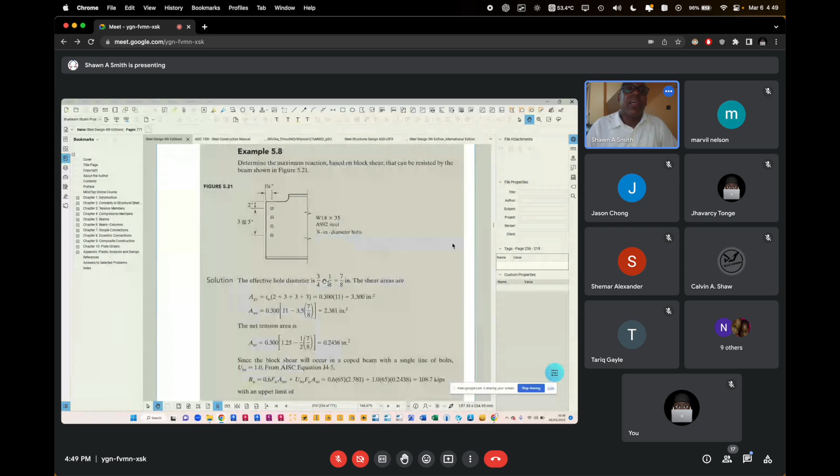But deflection comes after this 5.8. Let me tell you where it comes. 5.9. Right? See, the deflection comes in 5.9. But we are going to be stopping at 5.8, and only the simple part of 5.8. We're not going to be looking at block shear. That's when we start to do moment connections and all that with bolts tearing out pieces of your metal. We're not going to get into that yet, because we're not doing that kind of a design in this course. Maybe you need a structural design 3 for that.

All right. So I am reading from the principal textbook, Steel Design 6th edition by William T. Segui. And we are still on chapter 5 because of the beams, and bullet point 5.8. Now, this part here is just theory or like a narrative behind shear for people to appreciate what shear is before we start to look at all these expressions, formulas, factors, numbers, and whatever. So allow me to read so that we can grasp some knowledge before.

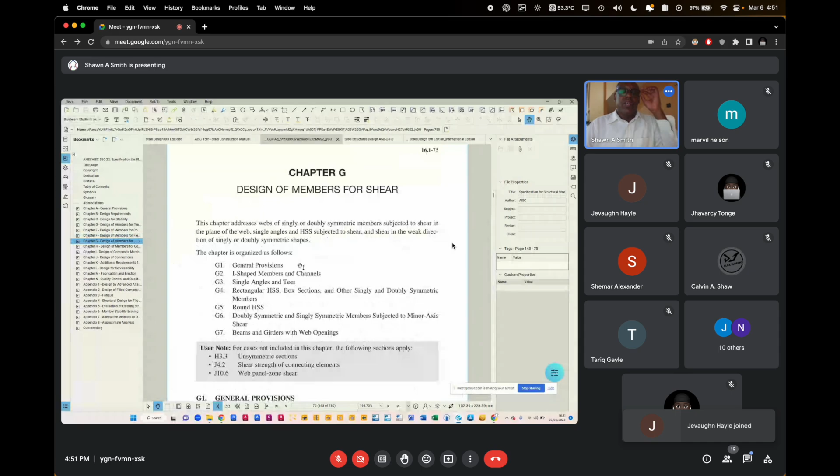Beam shear strength is covered in chapter G of the AISC. Again, this orange color book. I can't overemphasize this book that I gave you. So all that we're going to be looking at for shear is covered in chapter G. And luckily this time the bookmarks or the links are live, so when I click on it, it comes up. So this chapter deals with shear. See them there right away. It says here, design of members for shear. Both hot rolled shapes and welded built-up shapes are covered.

So there are two principal types of members: hot rolled, which are the ones that we have been recommending, the W shapes, or the H shapes, or the S shapes, or the M shapes, or the channels, or the angles. Those are all hot rolled. Or you also have built-up, which are made from welding plates together to get the same form. You weld 3 plates together to get the same I or W. So both of them are covered. We are interested, however, in just the hot rolled one, the one in the manual.

We discuss hot rolled shapes in the present chapter of this book. We are going to be doing the same thing too. And built-ups will be done in chapter 10. We won't be looking at built-up. The AISC provisions for hot rolled shapes are covered in section G2.1. So it's G2, I-shapes, and point 1. So it's referring to right here. Before covering the AISC provisions for shear strength, we will first review some basic concepts from mechanics of materials.

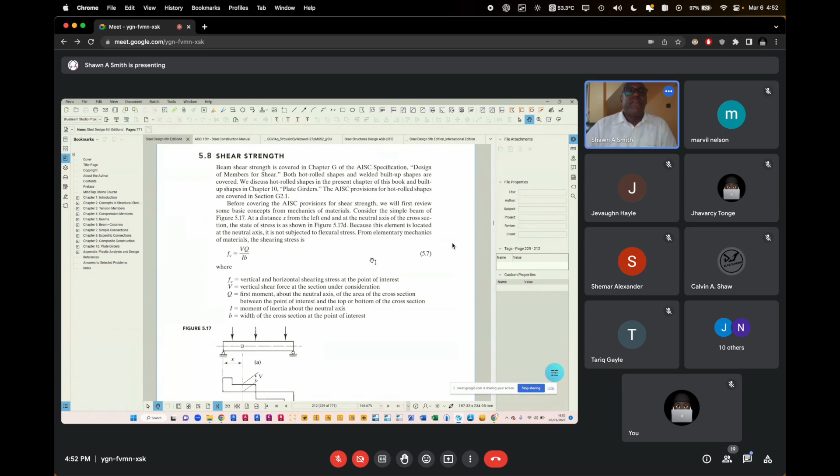Consider the simple beam in figure 5.17. This figure right down here. So this is a simply supported beam with a pin support and a roller support there, and it is subjected to 1, 2, 3 vertical forces, point loads. It says at a distance x, see x here.

From the left end at the neutral axis of the cross section, the state of the stress is shown in figure 5.17D. This is this. At any distance x, the state of the shear stress is shown, right? Because this element is located at the neutral axis, it is not subjected to flexural stress. No stress from bending.

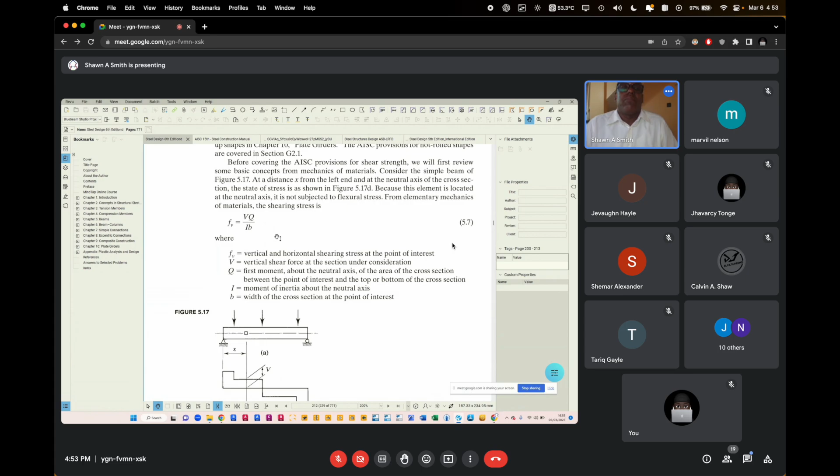From elementary mechanics of materials, the shear stress is given by Fv, which is the symbol for shear stress, equals VQ over Ib. Now this is general information. Let us now look at the definition of each of these terms in this expression. Fv is the vertical and horizontal shear stress at a point of interest, like this point x, right?

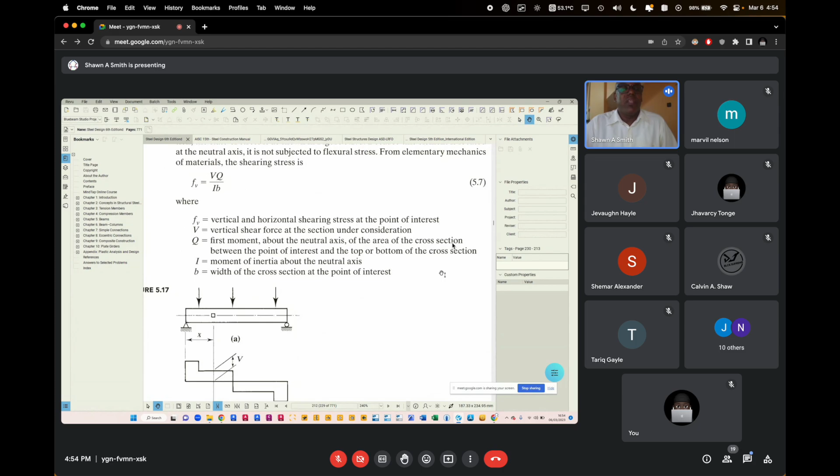V, the vertical shear force at the section under consideration, as induced by these loads, whatever the values are. So you take a particular location and you can find the shear stress at the location, right? Q, the first moment about the neutral axis of the cross section between the point of interest and the top or bottom of the cross section, and I is the moment of inertia about the neutral axis. B is the width of the cross section at the point of interest. So this is a general expression for how to find shear stress using all this illustration there.

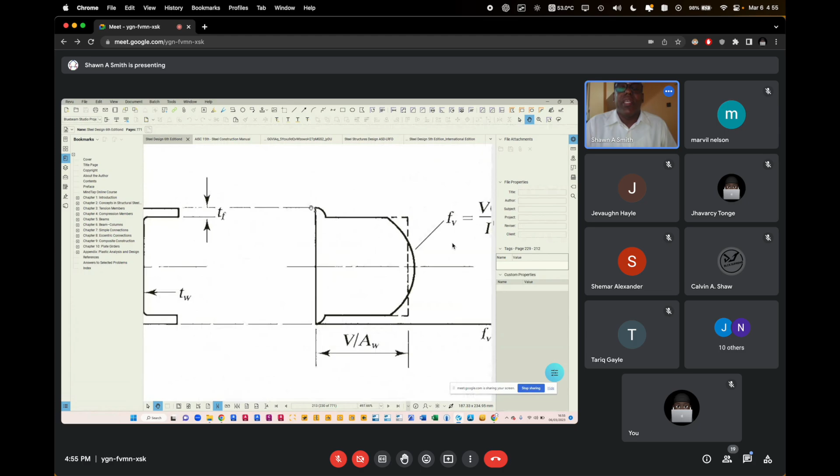However, we're not too interested in this shear stress thing. So we go further. And this is really showing the shear stress diagram. For argument's sake, if this is a cross section of a beam, then this is what the stress would look like. Because this flange is so thin, TF, the stress in the flange is just this little piece. Because the web is this deep, the shear stress will do like this in the web, and then go into this flange again and do this. So this is just to show the stress distribution.

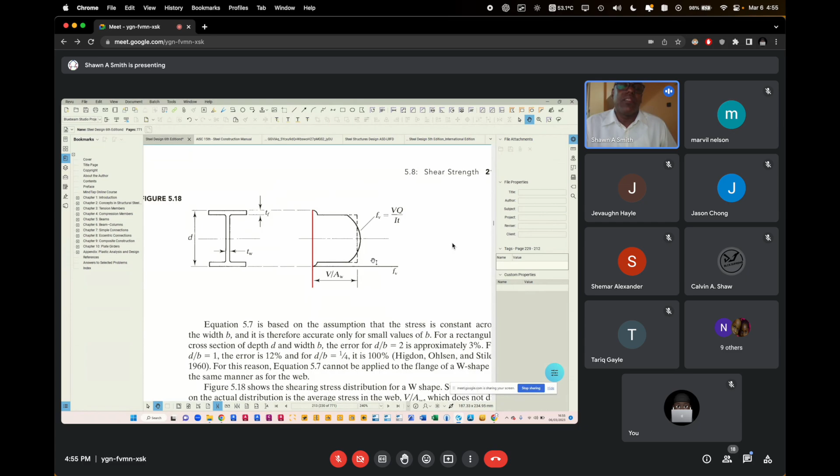This is the zero line really. If there were to be a line right here, then stress at that equals 0, and the stress increases as we move towards the right of the line. So this is 0, and then it starts to take on a value. That's what that means, really. All right.

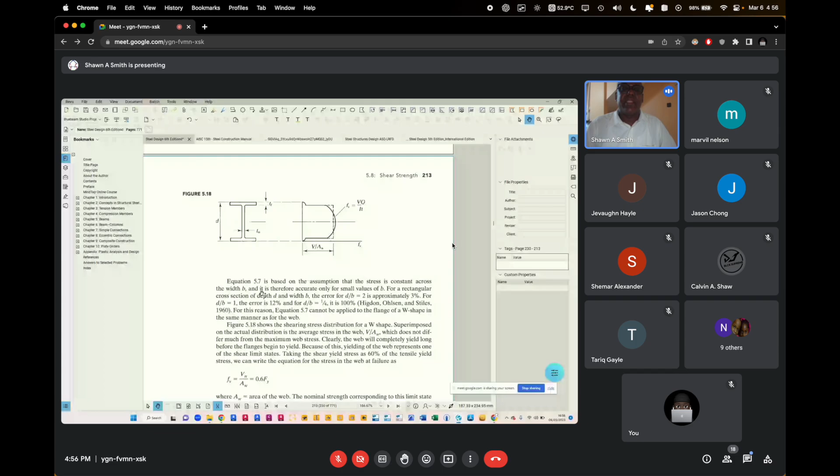Equation 5.7, which is the one above this one up here. Scrolled too fast. Equation 5.7 is based on the assumption that the stress is constant across the width B, and it is therefore accurate only for small values of B. For a rectangular cross-section of depth D and width B, the error for D over B equals 2 is approximately 3%.

For D over B equal 1, a perfect square, the error is 12%, and for D over B equals a quarter, it is 100%. So of course there are limitations. The assumption that the stress is constant across it is a limitation. And this was investigated and written down by these fellows. Thanks be to them. We don't have to get into all this. They use all this information and develop equations for us to work with, which is where we want to get.

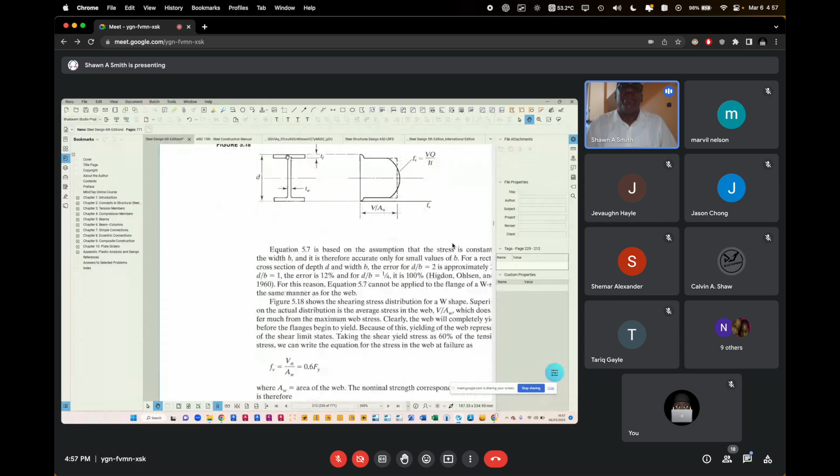For this reason, equation 5.7 cannot be applied to the flange of a W shape in the same manner as for the web. So we could not have applied this crude formula up here to an I section, because there will be different things happening in the web and the flange, respectively. So they are saying that equation is not valid for a W shape. All right.

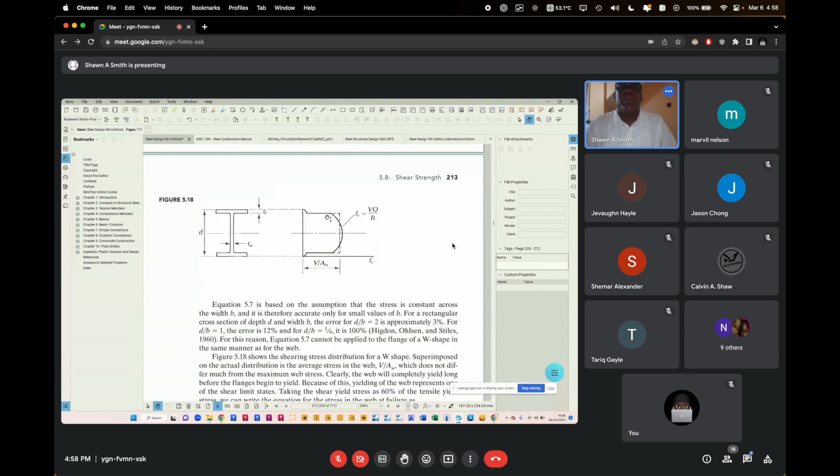Oh, sorry, I should have started right here. Figure 5.18 shows the shear stress distribution for a W shape. 5.18, which is this. I've looked at it before. Superimposed on the actual distribution is the average stress in the web, V over Aw, which does not differ much from the maximum shear stress.

Clearly, the web will completely yield long before the flanges begin to yield. Because of this, yielding of the web represents one of the shear limits. Taking the shear stress at 60% of the tensile stress, we can write the equation for the stress in the web at failure as follows.

So now, this is the equation that we are most interested in, because this is dealing particularly with W shapes or I beams, which we work with, right? Shear stress is equal to Vn over Aw, and that is equal to approximately 60% of the yield stress of the steel. Fy, we already know, is the yield stress, whether it's 36 grade or 50 grade or 65 grade. The 0.6 is because they have departed from saying that this yield stress is 60% of the tensile yield stress. All right?

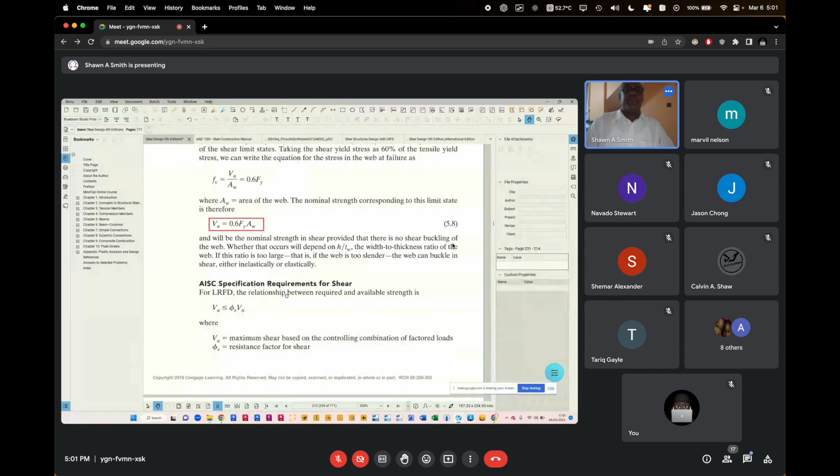Now let's look specifically at the AISC specification requirement for shear. For the LRFD, load and resistance factor design, the relationship between required and available strength is Vu should be less than or equal to phi Vn. What is Vu, class? Vu is nothing but the maximum shear acting on the beam from the load the beam is carrying. That's the ultimate shear, the shear you'll get from your 1.2D plus 1.6L. Vu equals the maximum shear based on the controlling load combination.

And phi v is the resistance factor for shear. We have a resistance factor for tension, for compression, for bending, and now we have a resistance factor for shear. If you look at this equation, class, it's always going to be almost the same. For bending, it was Mu should be less than or equal to phi b Mn. Now we move to shear, it becomes V. When we're doing compression, we had P: Pu should be less than or equal to phi c Pn. So this equation remains the same. It's the requirement for strength.

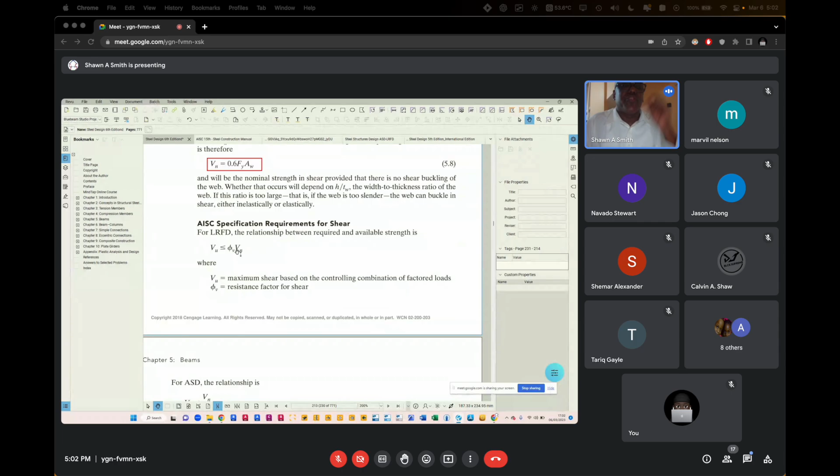Similarly, for the allowable stress design or ASD, the relationship is Va should be less than or equal to Vn over omega v. Again, class, Va is nothing but the maximum shear based on the controlling combination of service loads, and omega v is the safety factor for shear. Those factors you will soon get. As we will see, the values of the resistance factor and safety factor will depend on the web width to thickness ratio.

Section G2.1 of the specification, see the factors in there? So for those who want to learn to jump between documents to find factors, it's quoted. Section G2.1 of the AISC specification covers both beams with stiffened webs and beams with unstiffened webs. In most cases, hot rolled beams will not have stiffeners. So we are going to be dealing with unstiffened webs. We're not going to put any stiffeners on our webs. And for the benefit of those trying to figure out what beam web stiffeners are:

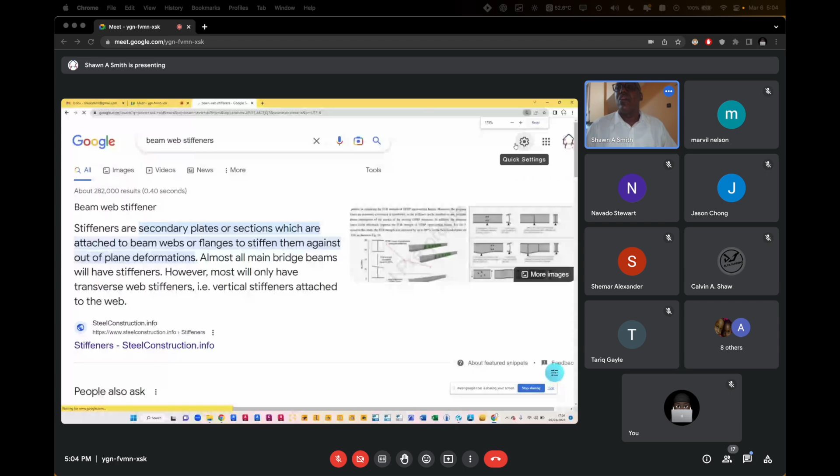You see my screen, class? Are you seeing the screen? Yes, sir. Yes, sir. All right, I'm trying to get the largest possible image of this. All right, fine.

So this beam in the top right hand corner right here, these two vertical members are what we call stiffeners. That's when we have to put in some plate and weld them to the beam so that the web does not buckle. The elements in the manual do not have this; we have to introduce it. So without it, it's referred to as unstiffened webs. We are interested in webs without stiffeners, unstiffened webs.

For this part of it right here, for people who are trying to figure out what is web buckling, this is a perfect example of web buckling. The extreme right image at the top, where you see the web bend like that, that's what we refer to as web buckling. So to prevent web buckling, sometimes we introduce these stiffeners. So the stiffeners brace against the web, so the web cannot bend out, right?

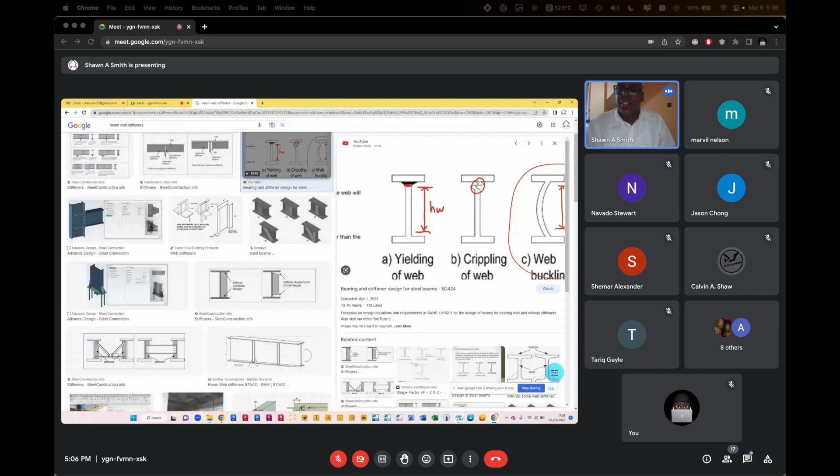So that was just to give an illustration of what unstiffened and stiffened web is. But we are focused on the sections in the manual which do not come with stiffeners, and we want to work with them unstiffened. All right, fine. In most cases, hot-rolled beams will not have stiffeners, and we will defer treatment of stiffened webs until chapter 10. We are not going to chapter 10, so we won't be looking at stiffened web.

The basic strength equation is, all right, so this equation is now moving from up here to something much more complex now. And this is because we now start to take into consideration the fact that the web can also buckle. So the equation becomes Vn, which is the nominal shear, is equal to 0.6 Fy Aw Cv1. Let's define what each of these terms mean.

Aw is area of the web, and that approximates to the depth of the beam times web thickness. It says here d is equal to overall depth of the beam. The overall depth of the beam you will know, class, because it's in the manual or it's also given in the beam designation. W10 by 15 means the beam is 10 inches, right? So that's d, right?

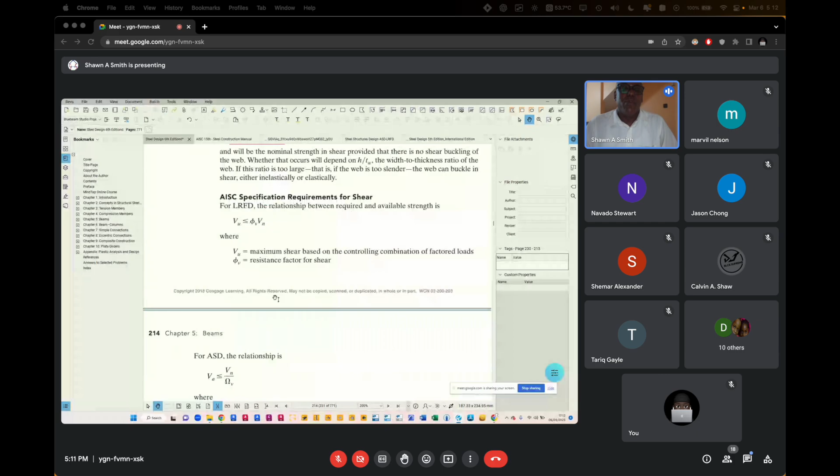All right? However, if h over tw is greater than this, then Cv1 is calculated as follows. And for both of these two cases, class, the value of kv equals 5.34.

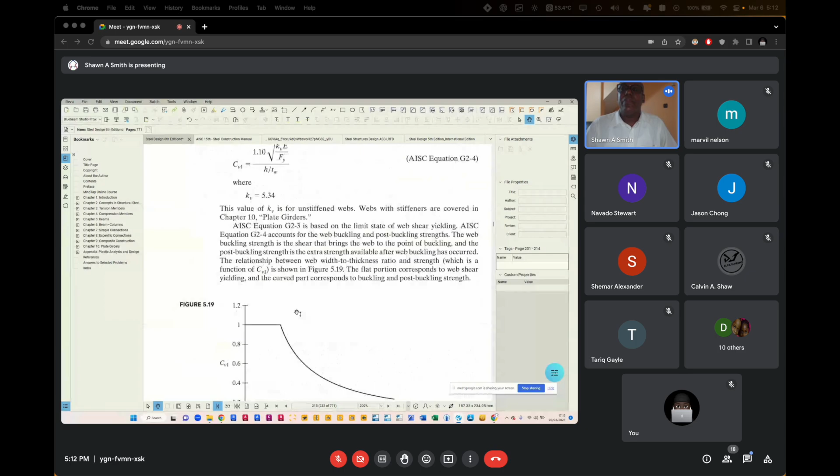The value of Kv is for unstiffened webs. Web stiffeners are covered in chapter 10. We're not going to chapter 10, so we are stuck with this. And class, that is it really. Nothing more to it than that. Unless you want to look at the allowable stress formulation, which converts forces to stresses.

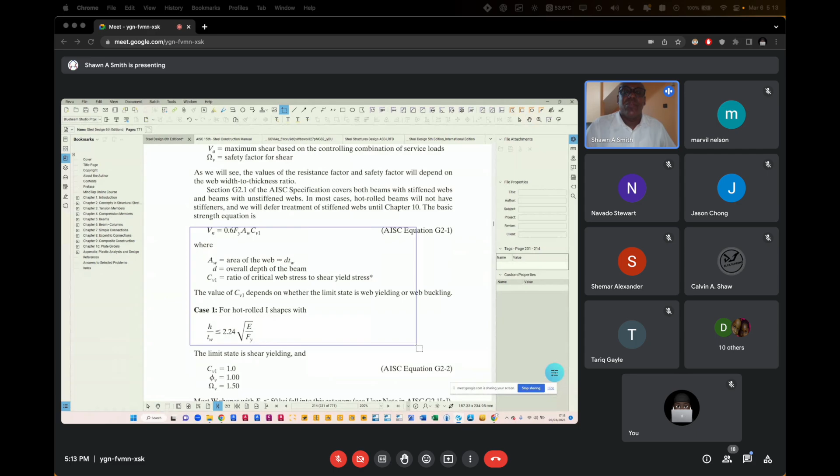All right. Now let us look at this worked example so that people can start to appreciate more what we did. I'm going to see if I can bring down some things so that they make more sense to us when we're doing it.

Jessica, go away with that thing. Yes. Bring it up.

All right, I'm trying to make sure that we have... change color. All right, good. I'm trying to bring down some information so that we don't have to be scrolling too far. All right, so that is that. Then the next check we have to do. So if we check that, then this happens. So we need this also. If that happens, then this. If that happens, then this. Then that. All right, good.

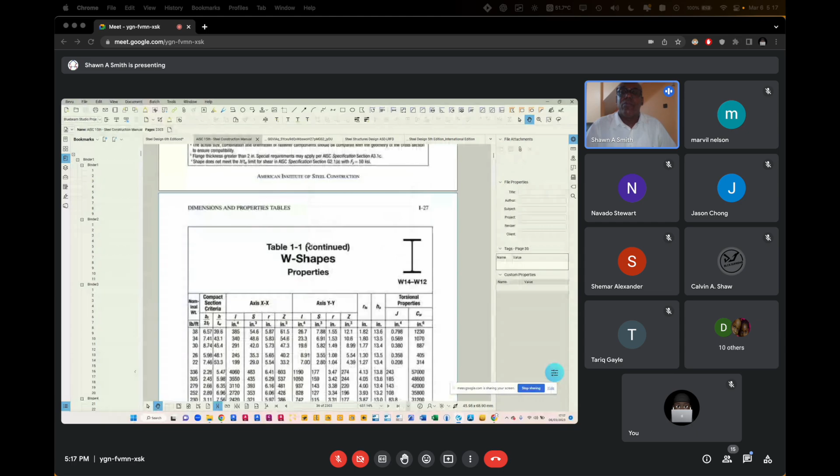So quickly, I am jumping across to the manual again. I'm looking for W section, and it's W14 by 90. So I'm at W12, 14. Looking for W14 by 90. I seem to be not too far from it. W14 by 90, this one. All right, what do we get from the table?

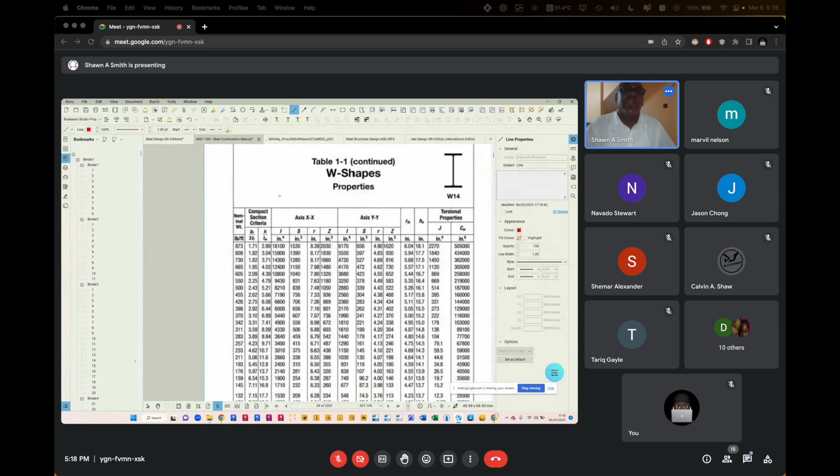In the properties table, the same W14 by 90, we don't even have to calculate anything for ourselves. They already give us this column, h over tw, the third column. So I move down until I come to that, and see, it's the value below. It is 25.9. h over tw, 25.9. So that's a given in the table.

So we have that. What should we do with it, class? We should compare it to this. And the web area Aw is d times tw. d is 14. Like I said before, d is the overall depth of the beam, 14 inches. And what's tw? tw we can find from the manual, up in the dimension part of the table. So tw is in this column. Web thickness, tw. And that is 0.44 inch.

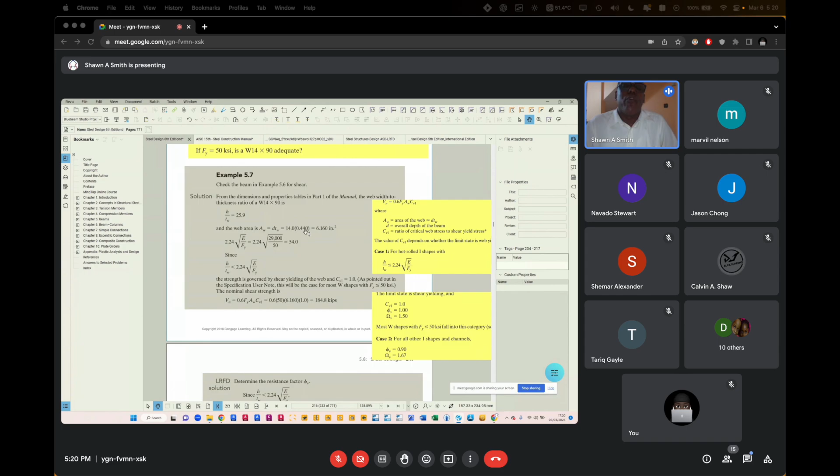So, class, that is what we multiply here. So the area of the web equals the depth of the web, or if you want to call it length of the web, times the thickness of the web, which is 14 times 0.44. We know the depth because it's a W14 element, and the 0.44 is from the table directly. Are we all following?

Class? I'm gonna sleep. Class? Still here, sir. You following? Yes, sir. Good.

So the check is to check if this is less than this. Calculating this numerically, it works out to be 54. Again, it's a ratio; there's no unit to it. So we compare this with this. Because this is smaller, since that is less than that, the strength is governed by shear yielding of the web. The web does not buckle. Remember, it does not buckle. So it says shear yielding, and Cv1 equals 1.

This is what this says. For case 1, for rolled I-shapes, if this complies, then the limit state is shear yielding and Cv equals 1, phi v equals 1, and omega v equals 1.5. And as pointed out in the specification note, this will be the case for most W shapes. And the nominal shear strength is given as this equation.

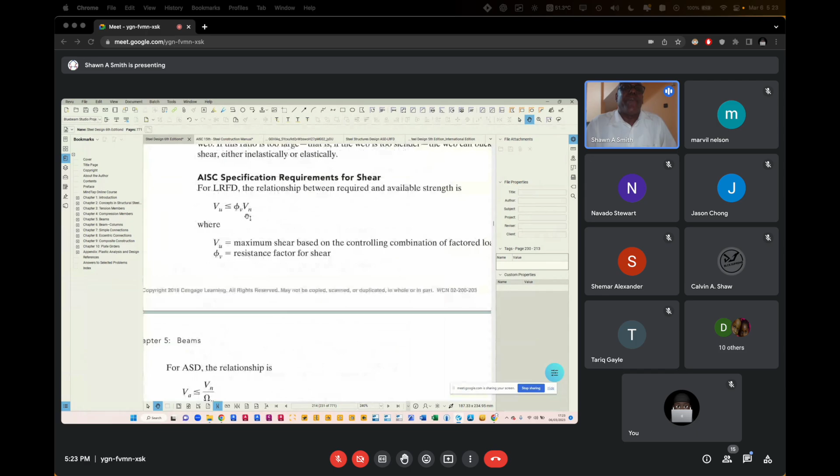The next thing is, this is nominal. What we really want is to be able to make this comparison: Vu should be less than or equal to phi Vn. So far, we have Vn. That's what I calculated just now, 184.8. What do we need? We need phi Vn. How do we find phi Vn? We need to find what phi is.

Phi v is equal to 1, again, because this criterion was met. It is in the shear yielding state. No buckling takes place, so phi v is also 1. So phi Vn is equal to 1 times Vn, which is 184.8, and it remains the same. They have rounded it up to 185 kips. So that is the design shear strength of that particular beam.

We now need to compare it to the shear acting on the beam, this Vu. So we now need to calculate Vu. Vu is nothing but the ultimate shear based on the loads acting. From example 5.6, which we are doing, I'm going to bring this down again so we can see the loads. Where are we? Down here.

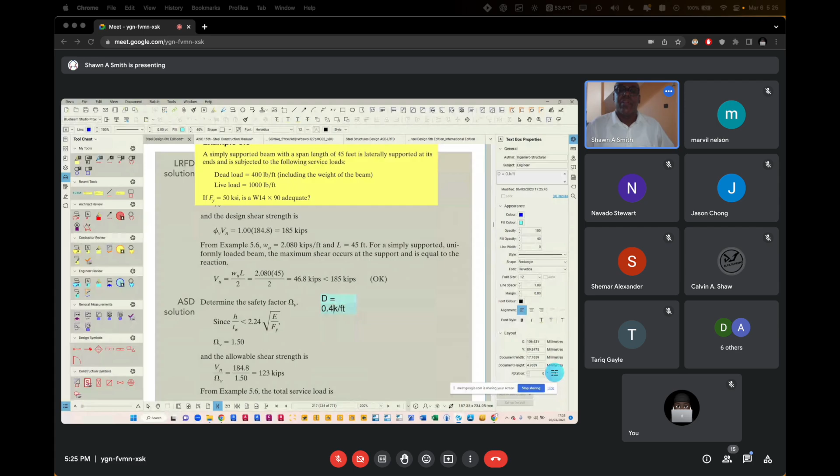Class are going dormant. Where's the class? What's the live load? Class? The live load is equal to 1.0. Are those correct, class? Yes, sir. Sure? Okay, fine.

Now the next thing is to do the load combination. The load combination is 1.2 dead plus 1.6 live. So it's 1.2 times 0.4 plus 1.6 times 1.0. What's the answer there now? That should be 2.08. That's where that 2.08 comes from. For those going through the example who might be wondering where that value came from, it's from the load combination we do when we have only live and dead load.

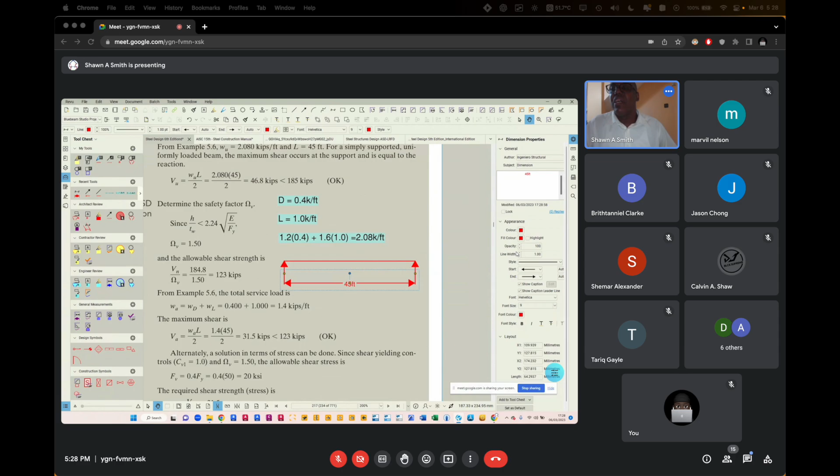If that is too large, let me make it smaller and change the color. All right, that's the beam. Let me drag these up to get some space. The beam has a uniformly distributed load like that, vertical. It carries a uniformly distributed load like that.

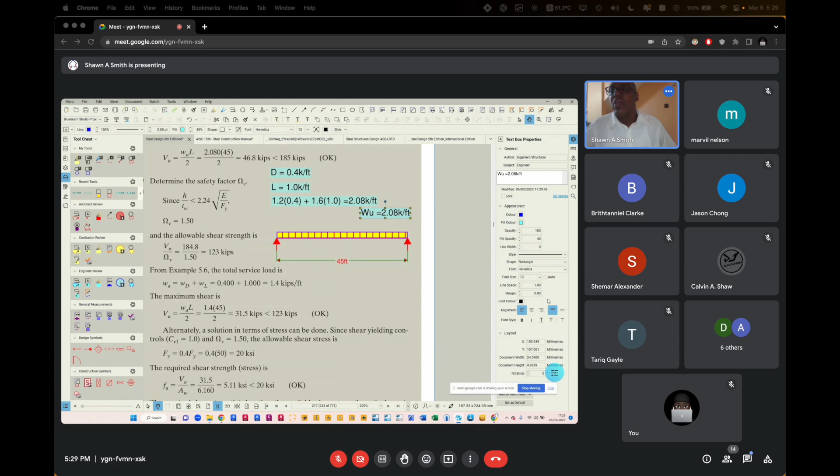And that load at the combined stage, W. I'm not going to put it on dead load; I'm going to put the combined load here. W equals that value, and that included the weight of the beam.

All right. So let me say W equals, for those who are making notes, and I want them to follow clearly what W means. W is when you apply the factors, right? So this is your beam, class: 45 feet long with a combined factored load of 2.08 kip per foot.

Now, we are aiming at finding the shear. The maximum shear force, class, occurs at the supports and has a value equal to that of the reaction. Wrong or right? I am pulling you back to what you should have done in structural analysis or advanced analysis. Yes. You have a simply supported beam with a uniformly distributed load. The maximum shear force happens at the point of the support.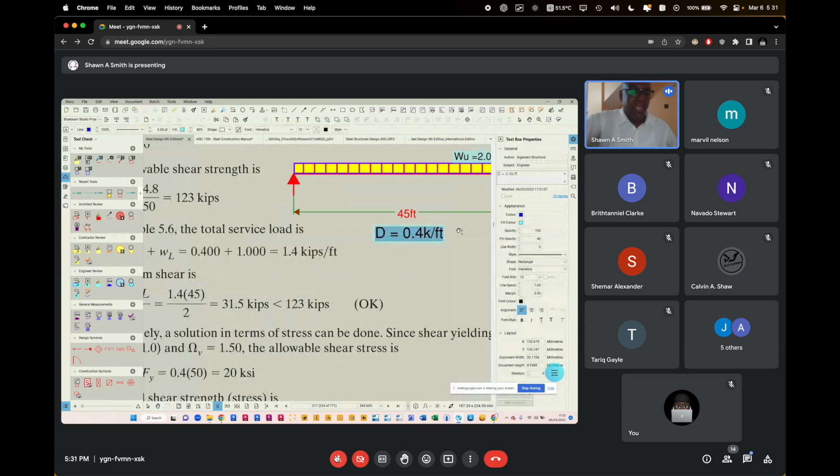That means support A and support B. I am going to go even further by calling them RA and RB. I want to be as simple as possible. RA. I mean, this was from last school year, but let's take the time and go through it now, because you won't be able to do shear unless you know this. All right, and this is now RB. What I want to speak to is that the maximum shear force V,

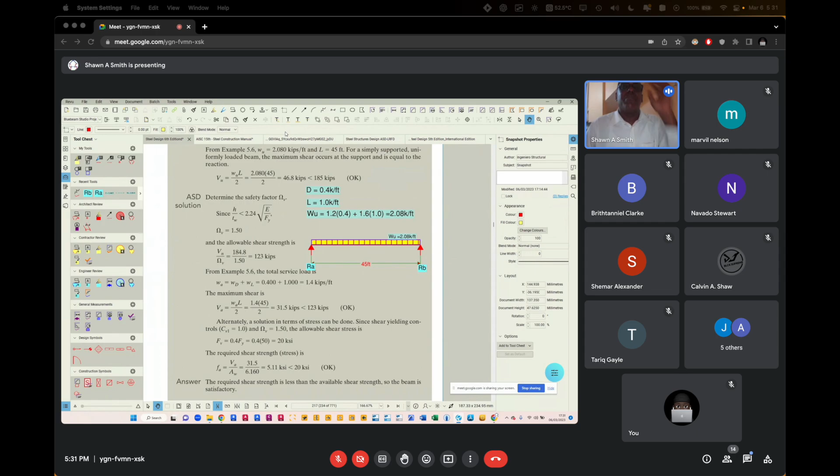and by the way, class, why does the moment diagram for that thing look like a parabola? Remember that diagram? That's the moment diagram. The shear force diagram for this will look like this. It crosses at 0 right there. Let me change the color. That's the shear force diagram for a beam like this. The shear force is 0 at the middle of the beam where the moment is maximum.

For those who know the relationship between shear and moment, the shear force is nothing but the first derivative of the moment, or vice versa. Right? So when the shear force equals 0, then the moment is at its maximum. There is a relationship between shear and moment, and that relationship is actually taking integration, integrating using the limits. But we're not getting to that.

What we know is that the maximum shear force on a simply supported beam carrying a uniform distributed load occurs at the supports, at these 2 points. It is a linear relationship. All right? And that value is equal to the value of the support reaction. So if you know how to find the reaction of a beam carrying a uniform load, then you already know the shear force. How do we find the reactions of a beam carrying uniform distributed load? Like this.

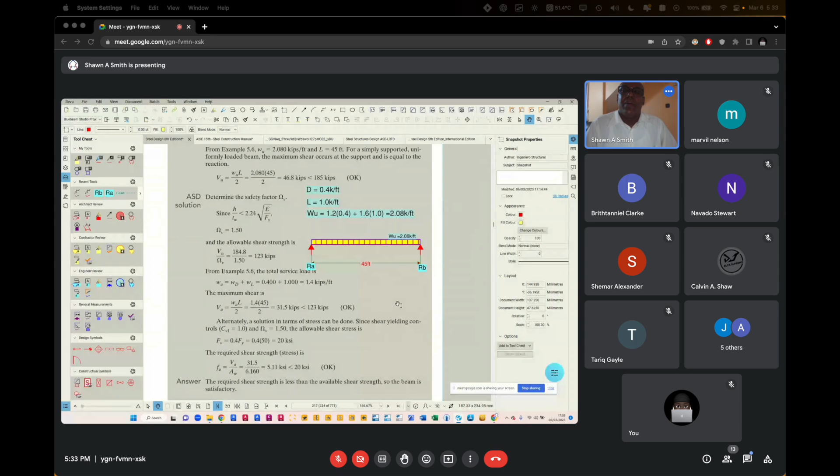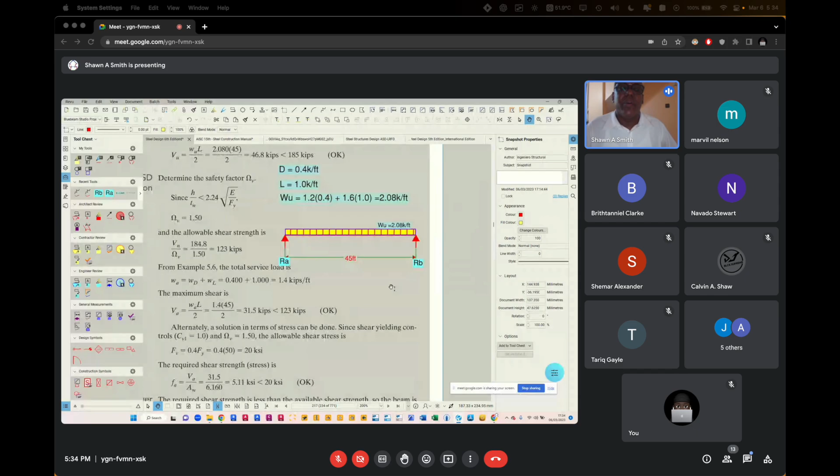But remember. So I think you'd convert the UDL into a point load and analyze it. And how do you do that? How do you convert this UDL into a point load? Times it by half the span, I think. Huh? Multiply by half the span. No, wait, hold on. One person said, yes, convert this UDL into a point load. And my question is, how do you convert all of this UDL into a point load? Right, sorry, you hear what I'm saying? Go ahead now. I think you multiply 2.08 by half the span.

No, let's go. If you're finding the reaction from this, you multiply by half of the span. But if you're converting all of this to a point load, you have to multiply by all of the span. Right, sir. Are you following? Class, are you following? Remember, the idea of this class is not to teach this. This is really prerequisite knowledge coming to this.

But let's go again. What does 2.08 kips per foot mean? What does it mean in real life? What is the idea of 2.08 kips per foot? No, no. I want an explanation. 2.08 kip per foot. What does that mean, really?

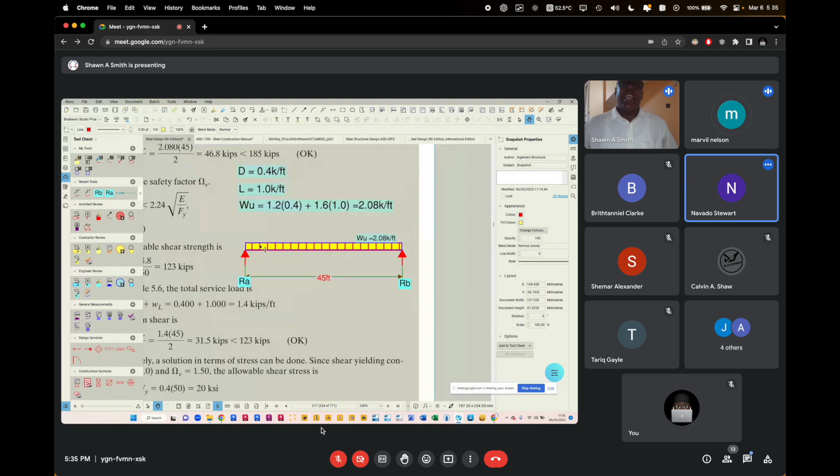Perfect. For every foot that we measure, if you should take it off and weigh it, it should weigh 2.08 kip. Then if every foot weighs that, and I have 45 feet in all, what do I need to know the total load on this beam? Multiply by the total length. You multiply the UDL by the total length. Good. Span. If for every foot it weighs that, then for 45 foot it has to be 45 times this. All right? So we're getting somewhere.

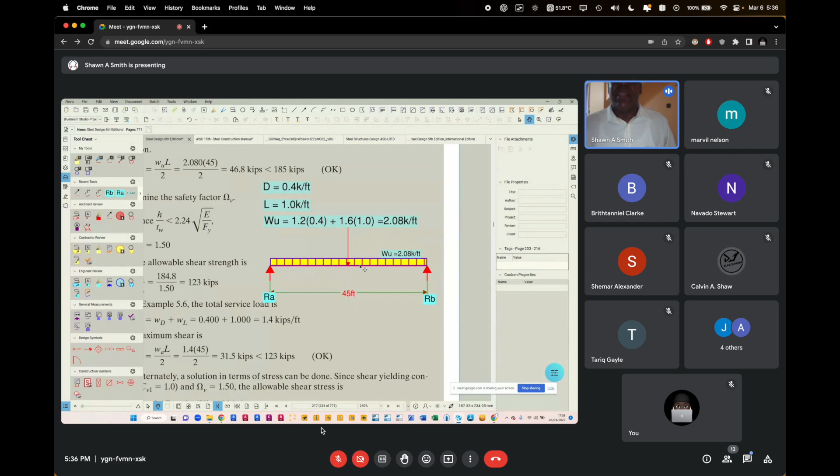Which is why this says W times L. So if I multiply this times 45, it brings me to an assumed point load in the middle. This times that converts this thing as if it were a point load in the middle with a value of 90, whatever it is. Now, if I have a point load in the middle and two reactions carrying it, what is the sensible thing to do to know how much each support carries? Divided by 2, because it's in the exact middle. If it were at one side, it would be a different scenario. But because we convert a uniform load to a point load in the middle, it's going to be half of this point load.

Class, that is what takes place over here. So it's WL to bring it to a point load, divided by 2 because half comes to the reaction. Are we seeing that now, class? Did that explanation make this easier for those who had seen this and didn't know where it came from? Class? Sir, I understand it now. You understand it now? Yes, sir. Anybody else still in doubt how they came about this?

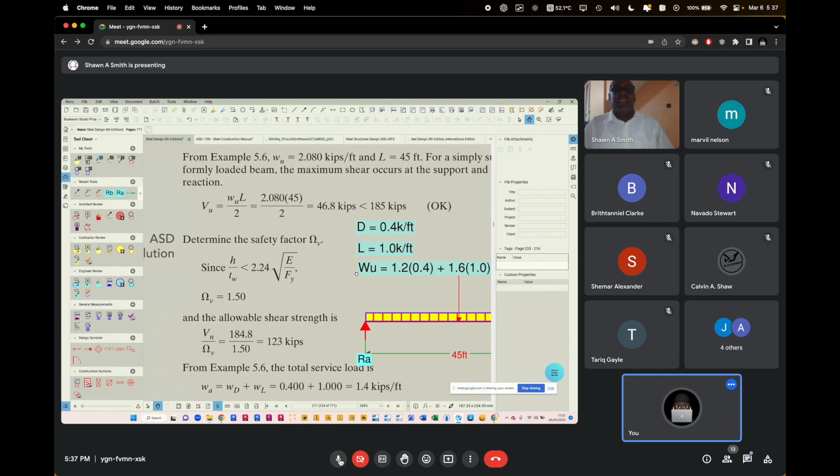No, we don't want the point load. We just virtually do something that brings it to a point load so that it can be easier. You can easily relate to it. But for some people who know analysis, you don't need to do that. You could just multiply this by half of this, which in essence is this. It's really bringing it to a point load in any case, because a reaction is a point load. A reaction will read kips and not kip-feet. As long as I multiply this by anything to do with feet, the feet is cancelled because it was in the denominator.

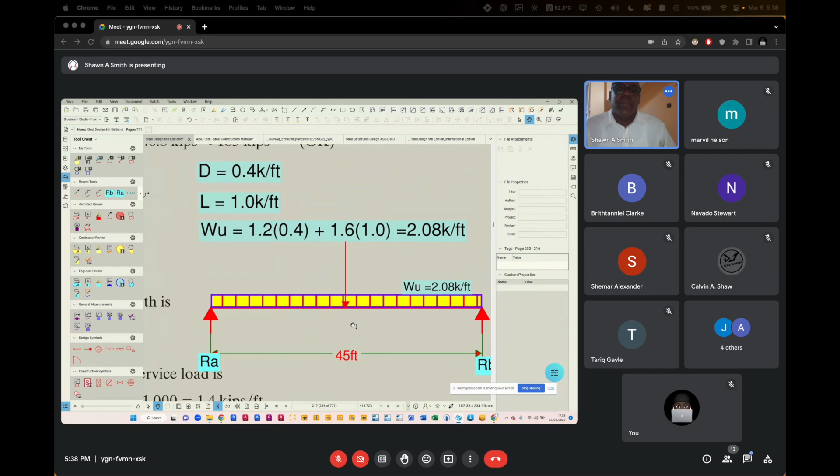But what this is doing in essence is saying: if for every 1 foot, let's say these red lines were 1 foot, each time I move 1 foot, if I take this out and weigh it on a scale, I will get 2.08 kips. That's what it means. So if I have 45 of that, 45 times the unit weight will give me the total. And that total will be like a point load acting in the middle.

Let me see if I can explain. You take a book. The book is rectangular. Where is the center of mass for that book? Class, the person who asked the question. You take a book, for example. Where exactly on that book is the center of mass? In the center of the book. Because the book is uniform. It's a uniform thickness, uniform length, uniform height.

The same thing with the load. The load is a uniform distribution. The load is rectangular like that. So the load acts at the center. The mass acts at the center of that thing, which is what this does. Which is why I said we can really convert this into a concentrated load which acts through the center of it. Is that clear now?

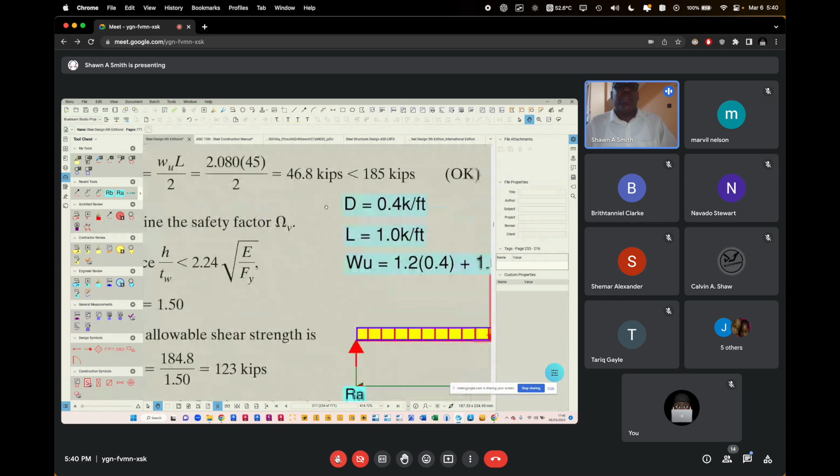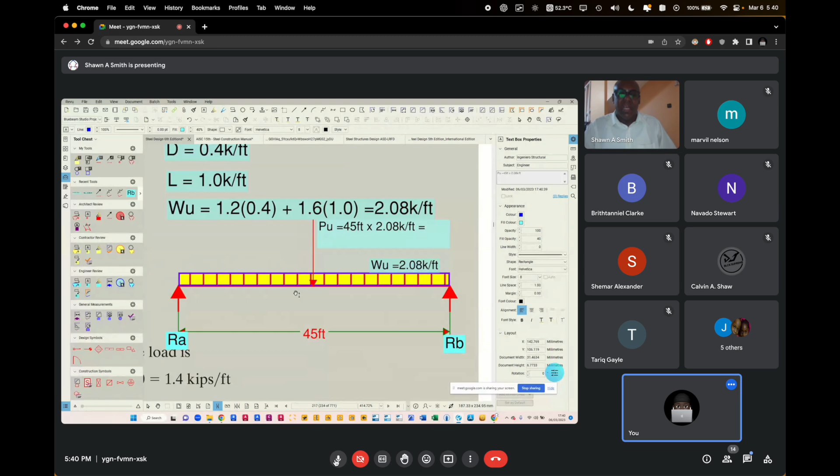Good. Now that we have converted that to a load in the center by multiplying, the value becomes whatever that is. Let's work it out and call it PU. If I multiply 45 feet times that, what do we get? Somebody give me the value. 45 times is 90 something. 93.6. That's 93.6 kips. Feet gone now because the 45 is in feet.

Good. That arrow, class, I'm going to change the color and make it thicker. That arrow represents a point load coming from this. And it's done this way because you are now able to see it quicker. If I want to find RA, if this is in the middle, it's a symmetric load arrangement. That means obviously half of this comes to this, half goes to that. That's why they virtually bring this up as a point load, so that you can quickly see it can't go any other way. Half must come to this, half must go to that.

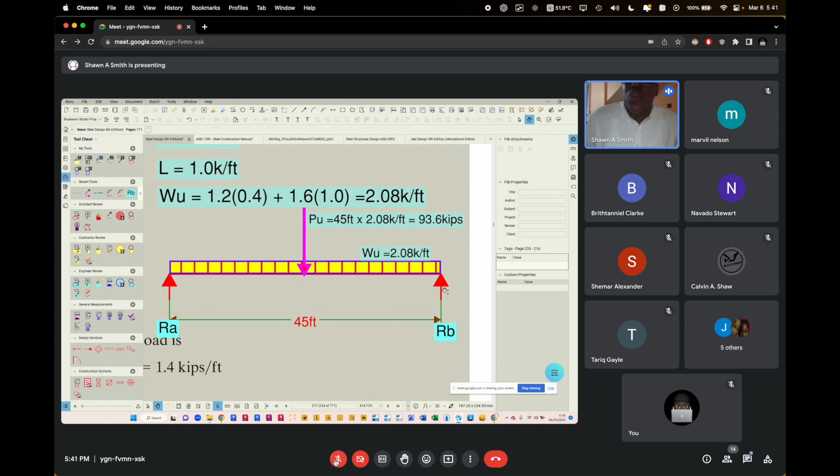All right. So once you have this, then you can say, okay, fine. RA is equal to this divided by 2. RB is equal to this divided by 2, which is what this over here is saying in one step. W times L is the same thing that we did right here. W times L gives us that. And divide by 2 is because we have 2 supports, so half goes to this one, half goes to that one. Same thing in one step.

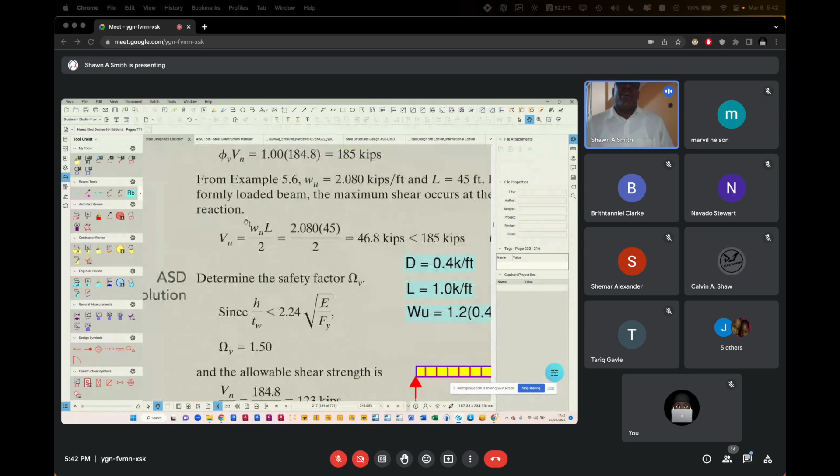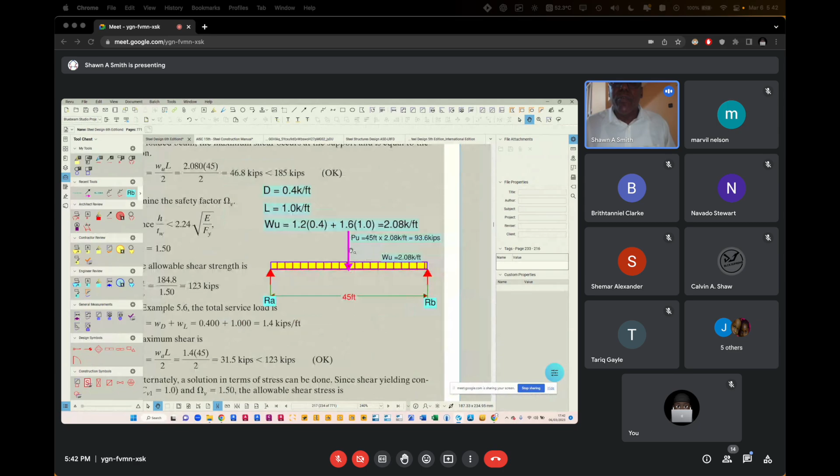I am taking the time to go through this so that for those who don't understand how this just jumps to that, it can now click there. So this is what happens. This is the illustration of what happens there. Again, go read up on analysis, because this is the simplest beam analysis you ever have to do.

All right, so let's leave that now. So we now know how to find VU. So VU is equal to this, which is this divided by 2. So this is the maximum shear acting on the end of the beam. But the beam can carry all of this, can't it? The design shear strength of the beam is actually 185 kips, but only 46 is acting on the beam. It therefore means that the beam is way satisfactory.

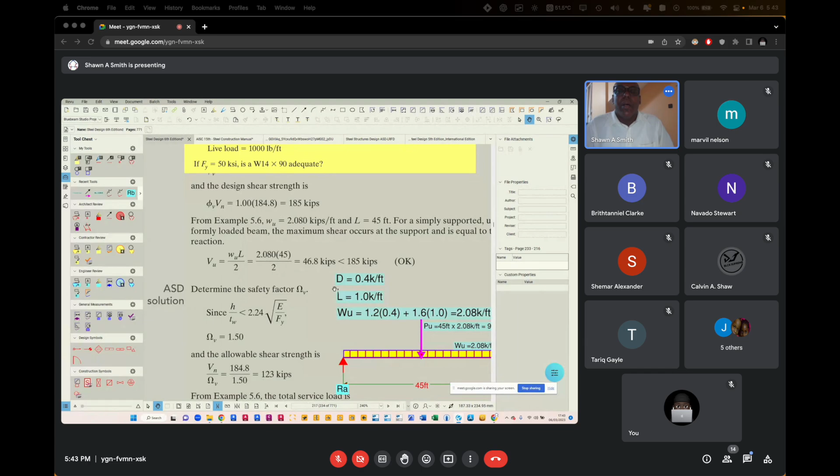Is that good, class? Any questions about that? Any questions? Class is rather silent. Let me see what's inside. 14 people in class. All right. Any question before we move to another example?

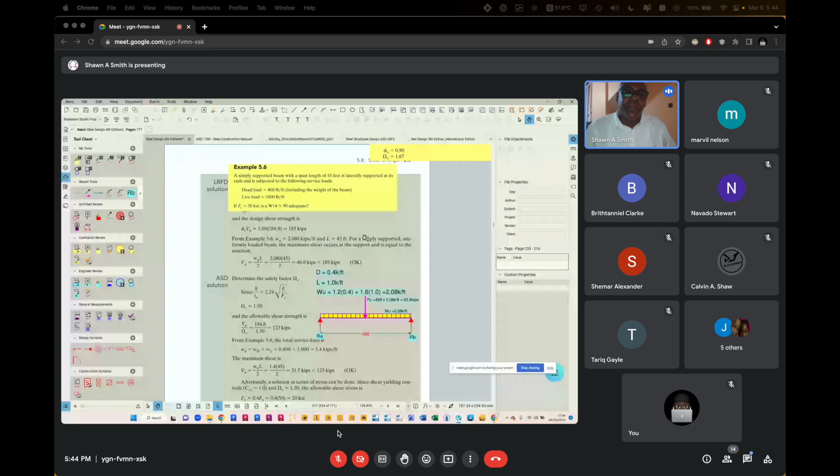And the same thing, class, would have been done with the ASD method, just that your Va will be coming from wa, and you'll be using a factor of 1. 1 times dead load plus 1 times live load to give it. But the principle remains the same. The beam will still comply, any of these two you use. All right.

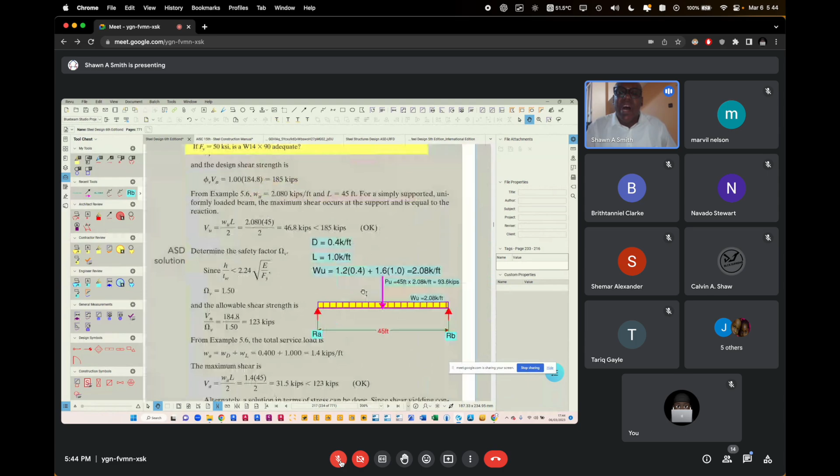Can I go to another example which sheds some more light? And also have you do this calculation yourself? Good. So let me clean up this. I forget. Clean up this. I'm going to find another example in another book, which maybe we should do this one. Okay, fine. Okay, perfect. Here's a good example. All right, I might as well make a sketch for this also.

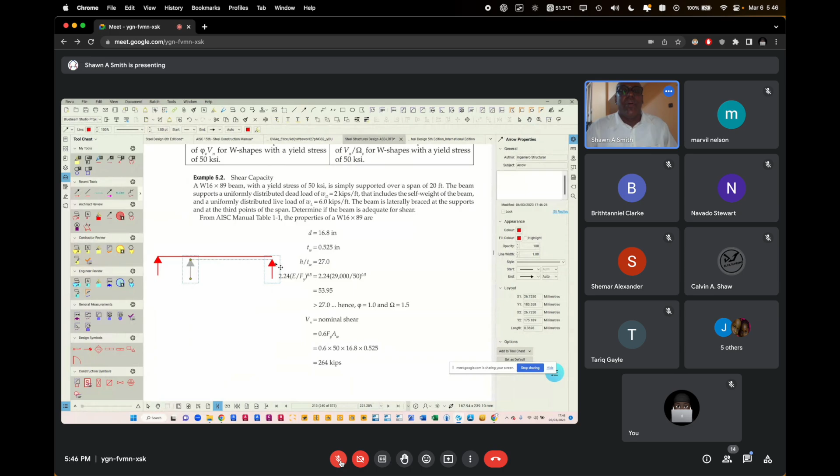It says here a W16 by 89 beam with a yield stress of 50 ksi is simply supported over a span of 20 feet. The beam is 20 feet long, class. Let me make a 20 feet long sketch, like I did earlier. All right, fine. So this beam is 20 feet long. 20 feet.

All right. So as not to confuse anything, I want to change some colors. So the beam is 20 feet long. It's a W16 by 89. So we want that down here also. W16 by 89. It says here, it carries a uniformly distributed dead load of 2 kips per foot, and that includes the self-weight, and a uniformly distributed live load of 6 kips per foot.

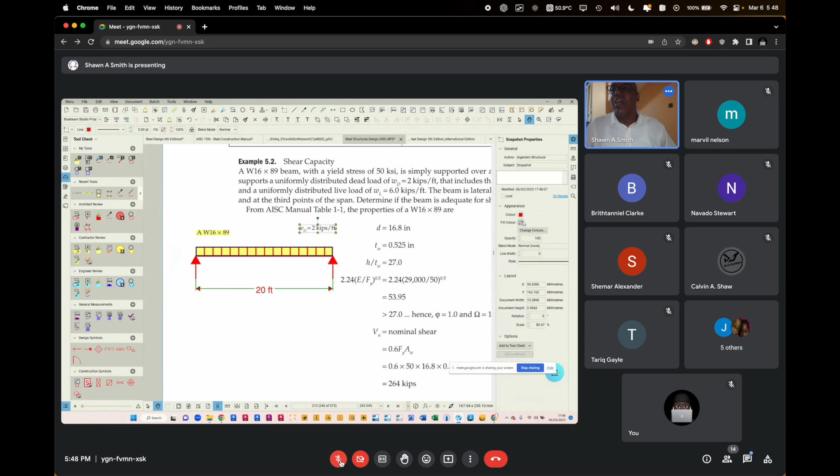So I'm going to draw something representing the loads. I want to change the color. No, that's too pronounced. All right, fine. So let's copy these now down there for ease and quick reference. So dead load is inclusive of the self-weight of the beam, and this is live load.

Oh, what's that? All right. So see this sketch there? That's the beam. And of course, we know that Fy equals 50 ksi. These are all data that we need to have right at our fingertips. So those are all data ready to go. We have that sketch, class.

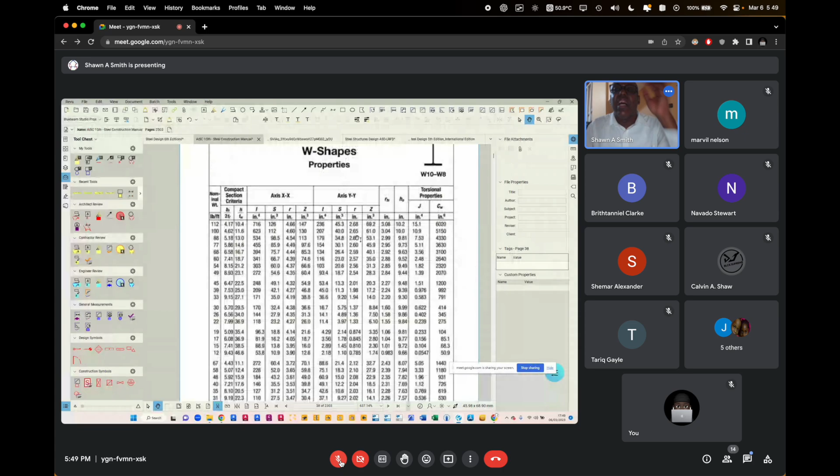Now, the question is, determine if the beam is adequate for shear. So the first thing we need to do is to check the web for slenderness, right? The first thing is to go and find h over tw. Again, this is the W16 by 89, so we go to our manual, and since we were on W14, let me delete all these red lines. I'm looking for W16. W16 should be above W14, so I scroll up. All right, so let me get rid of these out of my book.

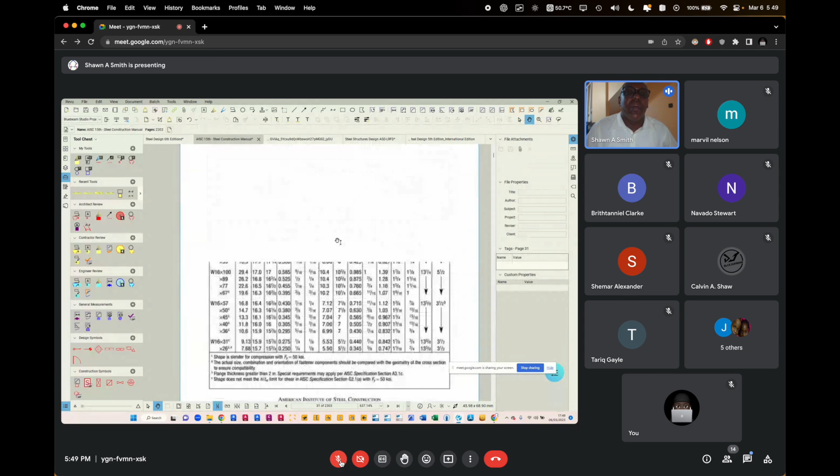W14, we're looking for W16. W6, fine. So W16x89. W18, W16. Okay, fine. So W16x89, here goes. So this is W16x89 on the dimensions page. That's dimensions. And I need to find W16x89 under the... okay, fine. So it's 1, 2, 3.

The 3 is stock number 3 from the bottom. 89, this one. Stock number 1, stock number 2. All right, fine. So this one. So I have identified my W16 in both dimensions and properties. So we want h over tw, which is this from the properties table. h over tw is equal to 27.

Now the remainder of it is calculation. 2.24 times the square root of... it's the same square root. They have only used a different method of doing it: raise it to the power of a half, or you say square root. However, it works out to be 53.95.

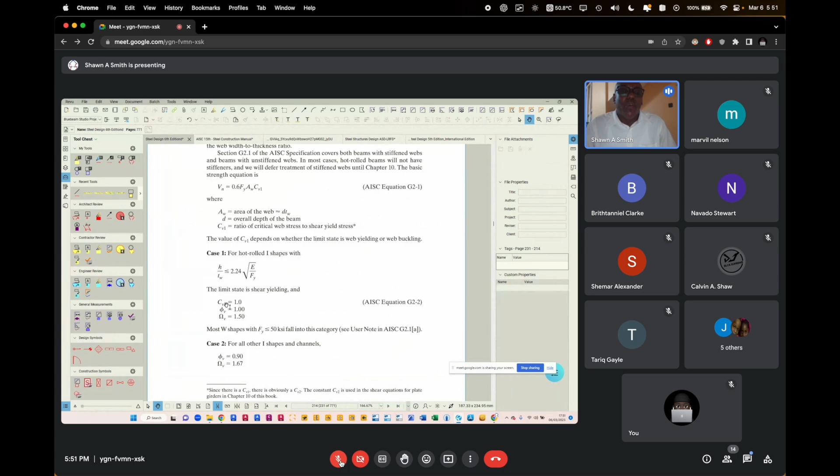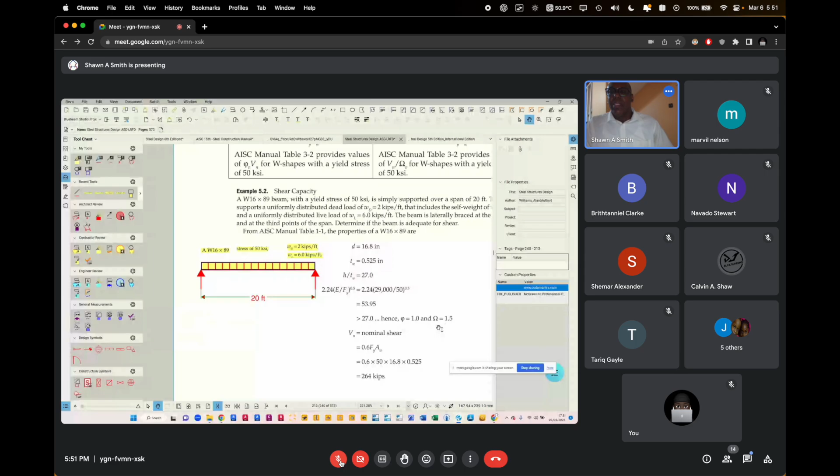It says if h over tw is less than this value, then the web is not slender and it will fail under yielding, which is what this says up here, case 1. Therefore, if that happens, then Cv1 equals 1, phi v equals 1, and omega v equals 1.5. So it did happen in this case, which is why they said phi equals 1, omega equals 1.5, and Cv also equals 1. They did not write that out.

And that is why the nominal shear is equal to 0.6 Fy times Aw Cv1, which is equal to 1, but they dropped it because it's equal to 1. And that gives us a nominal shear of 264 kips, class. That is from the material of the beam itself. Now we need to compare the design strength. This is nominal strength, so we need to calculate the design strength next. The design strength is phi times Vn. Phi is equal to 1, as seen down here, so it remains the same.

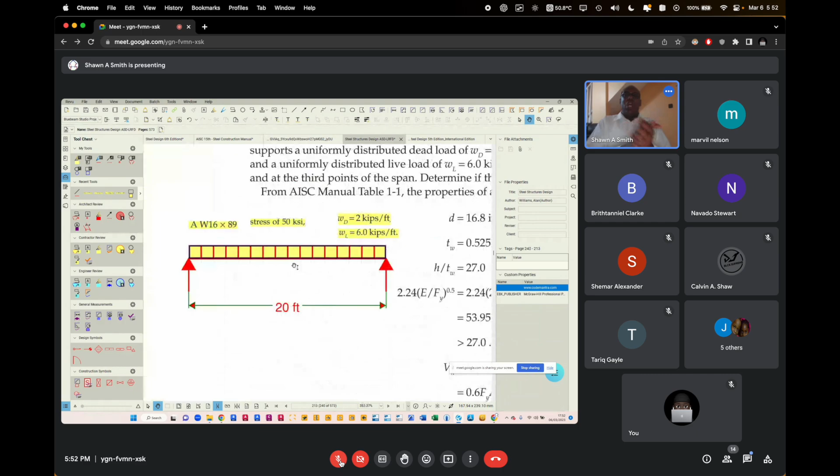Now, the big part is for you. We have just gone through an example. I want you independently to calculate Vu, the shear acting on the end of the beam, based on what we just did. By the way, these are unfactored loads as is right now. Do not confuse them with Wu. Right now, WD means unfactored dead load, and WL means unfactored live load. When you factor them and add them together, they become Wu.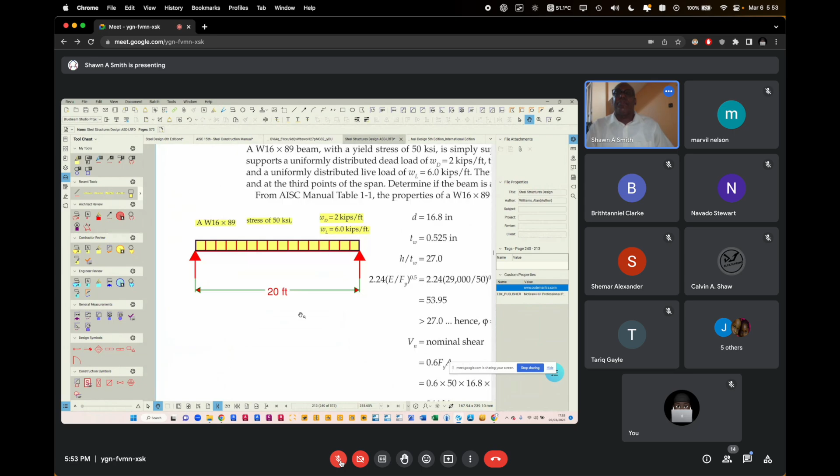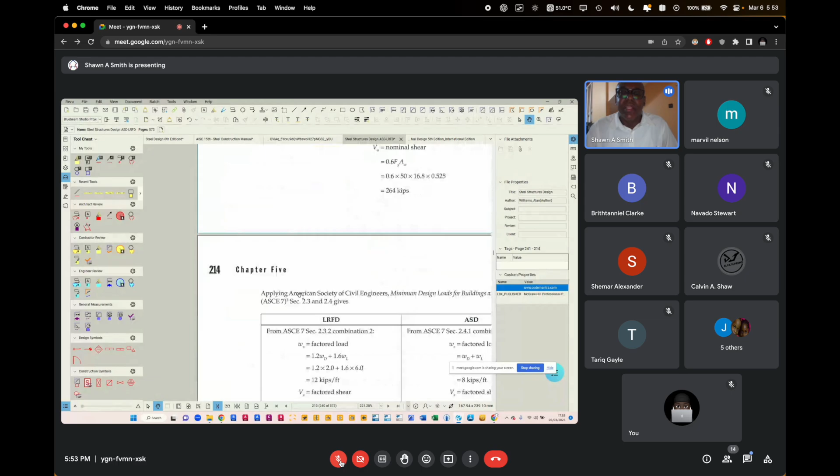Know the difference. So, class, I want you to calculate and tell me what the shear forces or the reactions are. What is Vu? You can tell me while doing it, or you can do it individually and then tell me. But for now, that is the exercise. Let's not take too long. Time is almost exhausted.

Any answers yet? Any answer yet? All right, I'm going to do this quickly, so that when you have your answer, I can compare. 1, 2. All right, I'm done. No. Any answers yet? Any results yet? Sorry. Wait a minute. I'm waiting. Any results yet? Huh?

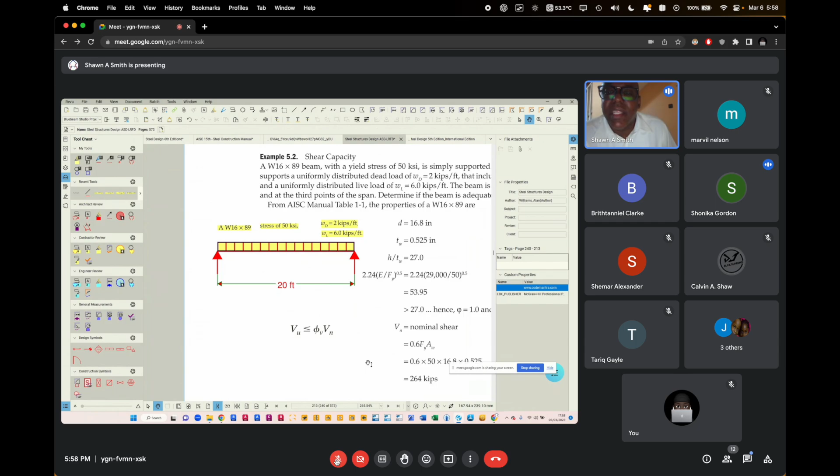120. Okay. Anybody else? "Sir, I got the same thing." You got 120. Anybody else? Okay, fine. So 120 is the answer. See it up here. The factored load Wu is equal to 1.2 WD plus 1.6 WL. When you combine the loads, Vu is the factored shear, the same as the support reaction, given by wL divided by 2, which is 120 kips. So the beam must be able to withstand 120 kips at the end.

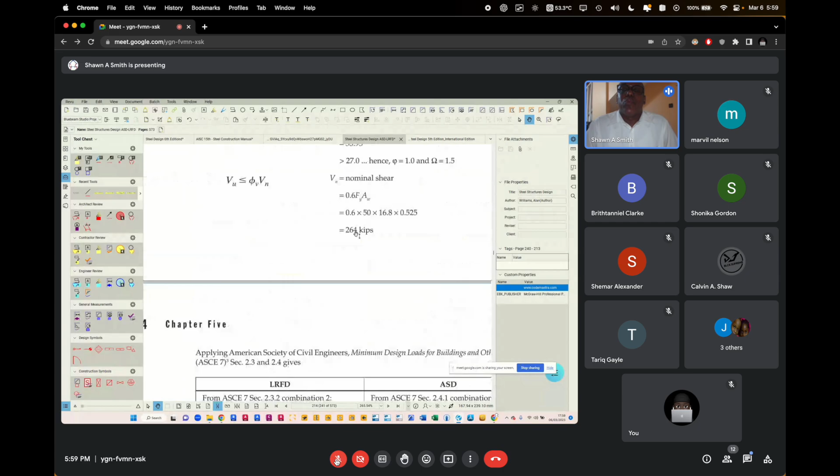Now, how much can the beam withstand? The beam can withstand phi Vn. Vn, we already know, was 264 kips, and phi is 1 because the web didn't buckle. From this narrative right here, no buckling takes place because it's compliant. So phi equals 1, and that is why 1 is used right here. So phi Vn is equal to 264. 264 is way more than 120 kips, so the beam can satisfactorily resist shear.

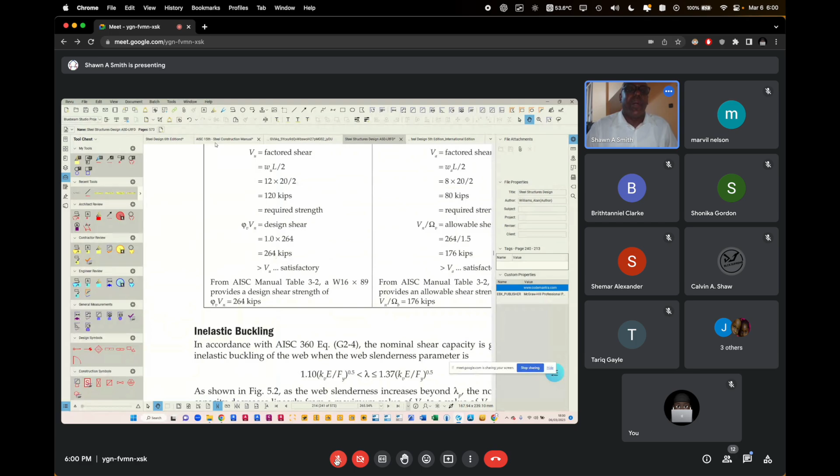Now, very interesting. Remember when we did moments, we also went into the manual to find moments for beams. You can also go in the manual and find the shear for beams. We calculated it to be 264. If we go into the manual, table 3-2, I'm going to see if I can quickly find that table. Table 3-2. All right, fine. So we are 3.6. I'm moving too fast.

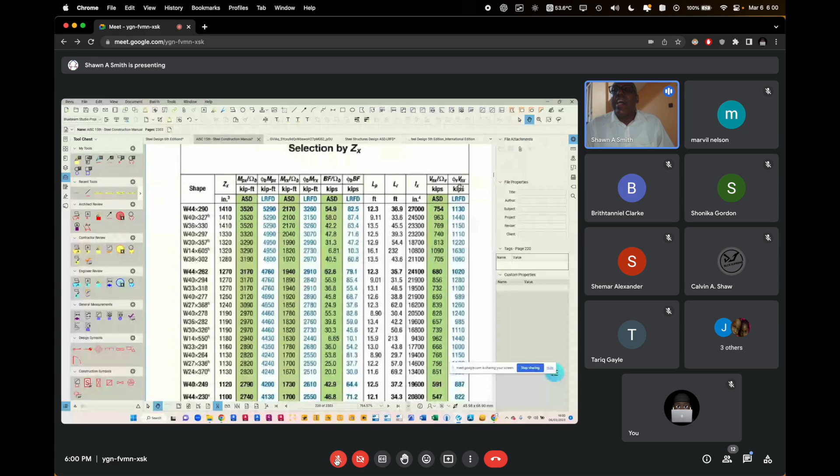All right, fine. Remember, we use this book to find moments, right? And to select a member. The same table can be used to find the shear force of beams. If you look to the extreme right, see here, see there, phi Vn or Vn over omega V. So we are using the LRFD. So we just need to find our particular shape.

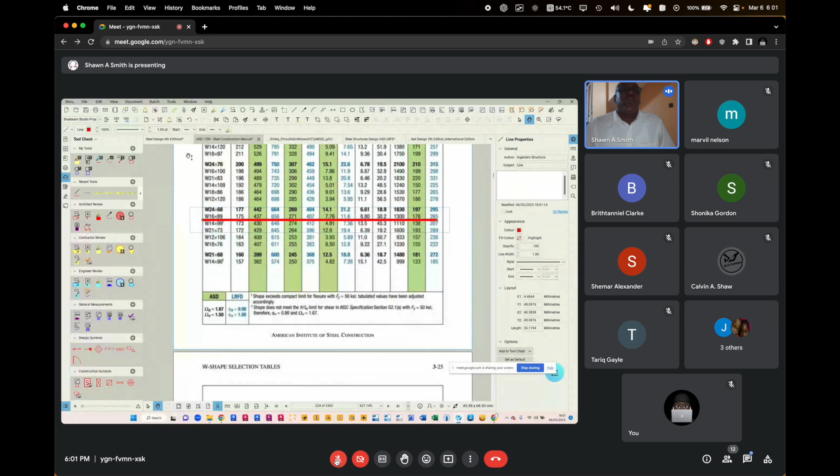Our beam is W, let me see the size again, W16x89. So we're looking for W16x89, 16 by 100, 16 by 89 here, W16x89. So we move over and see it says 264. Sorry, 265. All right? It says 265. We have calculated to have 264, but not so bad after all. Right? So we can use a table or we can do the raw numbers like we did right here.

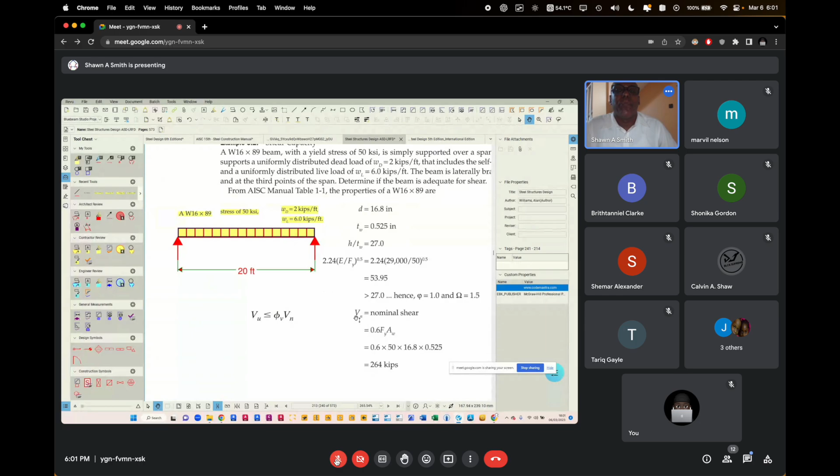All right? But doing this way is much more practical, especially for those who... right. So that's it for shear, really. Shear doesn't go past that. The only thing is that we are lucky so far to have two cases that brought us to this. If we have a case that brought us outside of that, we'd have to go and use these. I might find an example for tomorrow morning. I will do that first and then move on to connections.

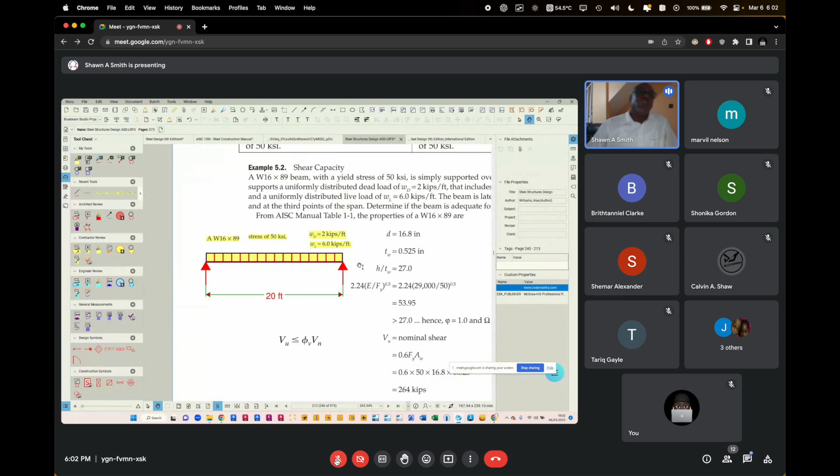All right? But that's where shear really stops. It doesn't get more difficult than that. It's easy to check the web if it buckles. If it doesn't buckle, then you know you're in case one, and simply this applies. If it buckles, if it's more than this, then you know you move to case 2 and you have to calculate these to see what Cv you must use. It's a matter of comparing the nominal design shear, phi Vn, versus this.

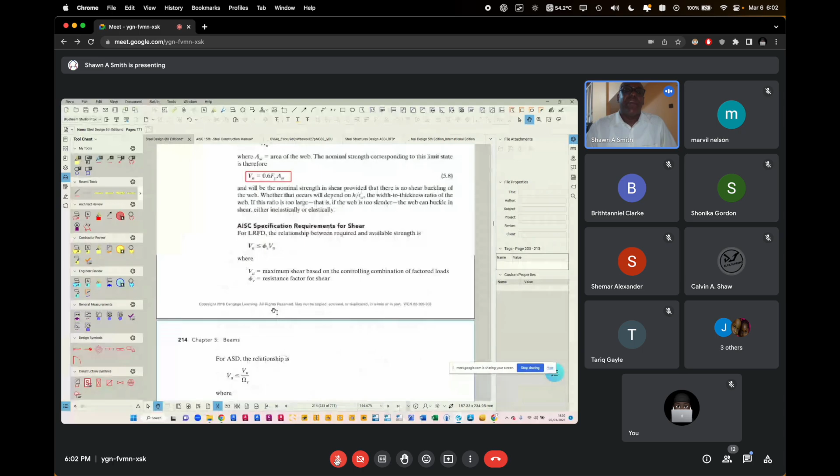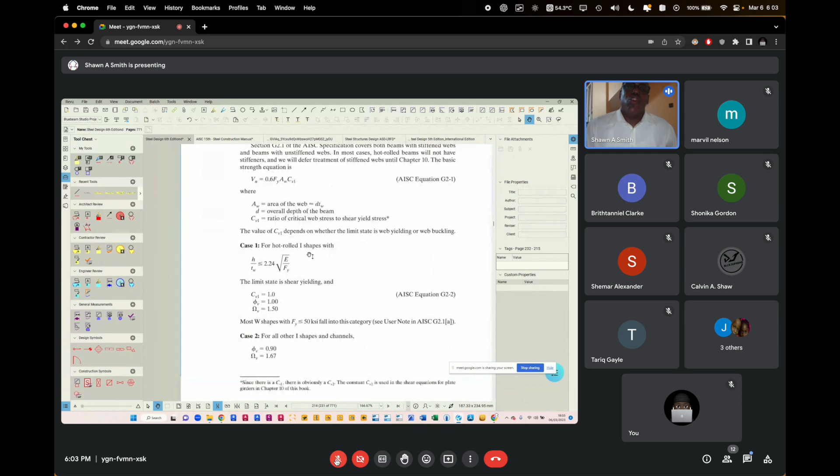But sir, for the other case, it would be for I shapes though? All of them are for I shapes. Let me see if I can read it again. This one. See there, for all other I shapes. So there are some I shapes that fall within this. It said most W shapes, which is the same as I shapes, fall within this. But for others that don't, then you use these.

You get it now? So if you do a calculation for an I shape and it does not comply here, you jump into this one. Right away they gave us these two values, but no Cv, because Cv is also subjected to other checks. So we have to do other checks to find what Cv value we must use. We would find ourselves in one of these down here. Okay? I will go through tonight and create a scenario where that happens, so we can look at that.

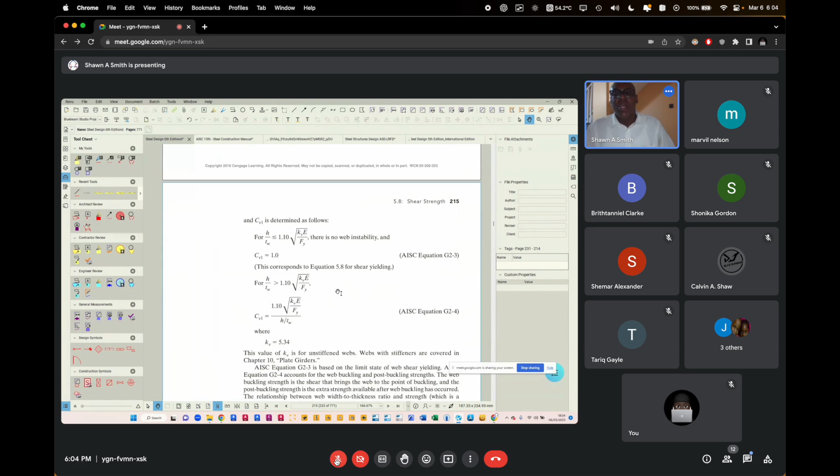But that's really it for shear. Shear does not get anywhere past that for simple beams. Which is why last week I wasn't worried to rush into shear. I spent the time to look at what we looked at, because this is something they can cover in one class, which we did. All right. So that's where we end class. This is chapter 5 of Steel Design 6th edition, section 5.8, for those who want to go back over, including the worked examples.

All right, 5.8. Sir, before you go, I have a question about the assignment I forgot to ask last week. For one of the questions, when do you assume Ae equals An, and when do you use a shear lag factor? Well, let's go there. Your question is, when do you assume Ae equals An? Yes. But there's no way that we should assume that. Okay, sir, in the question... Okay, fine. We did some worked examples where they made those assumptions, right?

Yes. Right, and I did say that at some point they actually say assume AE to be 0.85 AN, remember? Right, and I did clarify that the author would have done that because we did not get to the point of knowing how to calculate AE yet. Okay. Right, so now you know how to calculate AE using the different cases, whether you want it to be 3 bolts in a single line or whatever, or you want it to be an angle or a plate.